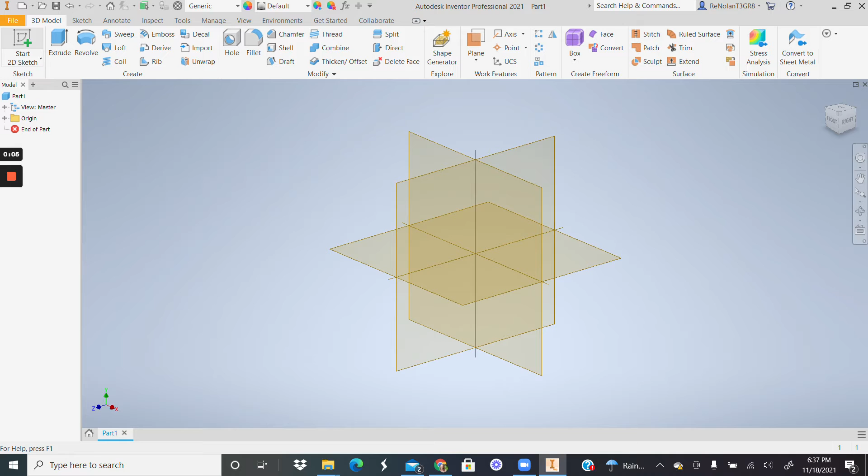Hi everyone, I wanted to talk a little bit about bolts and screws and how to create those in Inventor.

So the first thing you're going to do is start with your sketch. In this case, I'm going to go with a polygon, a six-sided top piece to it. So create my sketch, dimension based on whatever it is you're looking for. Let's go with 12 for now. I'm also going to add some constraints to get it just lined up right.

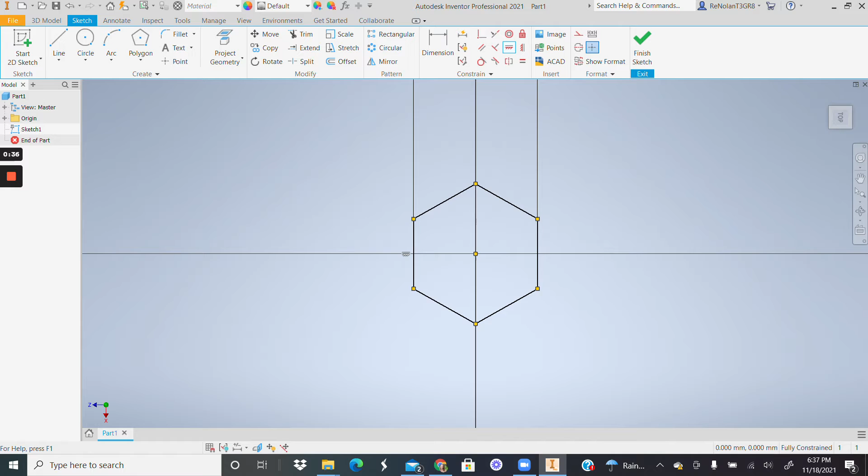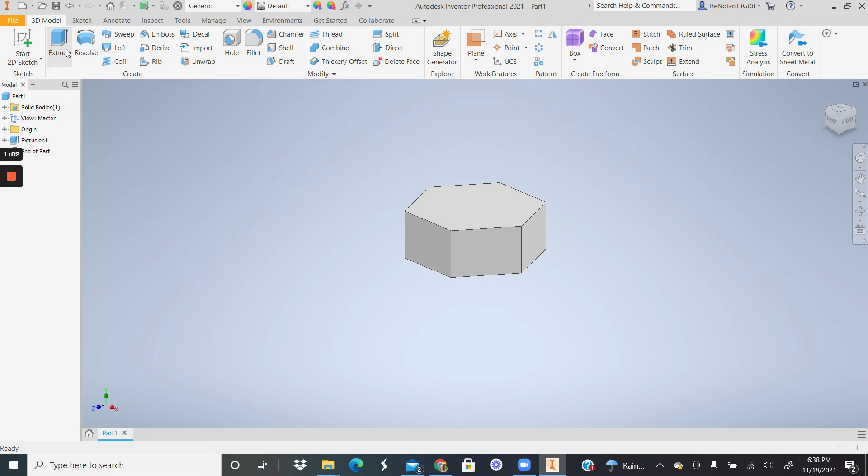Next thing I'm going to do is extrude that, whatever height is needed. Let's go with a 5 for now. A lot of times the top of bolts are going to have a taper to them. This is something you're going to see with nuts also. So the way you're going to get that feature is to start another sketch.

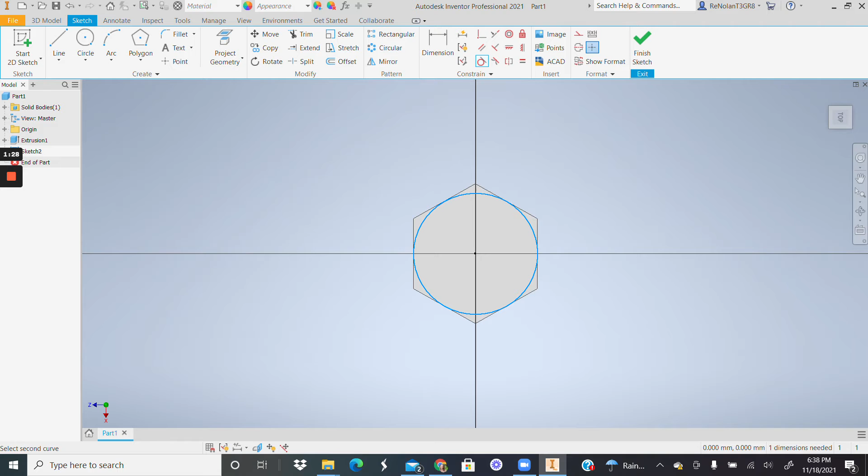In a lot of cases, you're tapering from like a circular part to get taper into the hexagon. So what we're going to do here is we're going to connect to that center point to get our constraints, and then let's add a tangent constraint with our hexagon and finish that sketch.

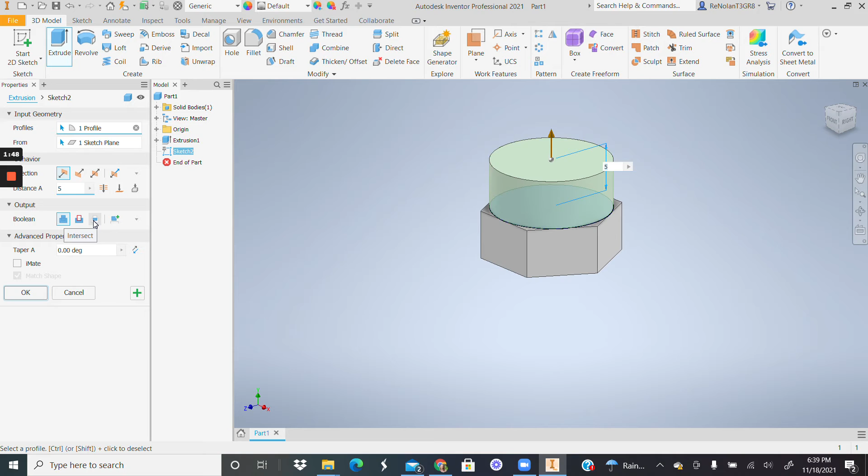Now we're going to go into this extrude feature, and if you look down here for our output options, there's a couple options. So there's join, cut, or intersect. We're going to use the intersect, and we're going to add our taper to it. So let's say you needed a 30-degree taper.

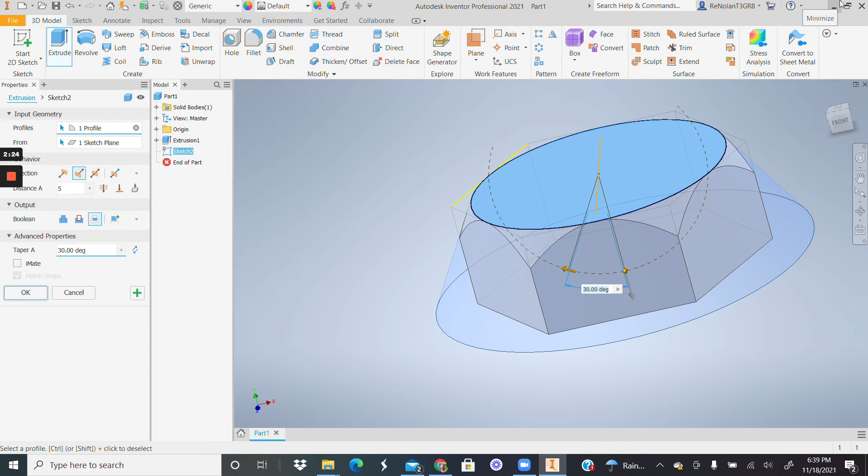You add that in, and in the top portion, as your taper is growing, you're going to have areas where it's cutting off parts of the bolt that was there to give you that taper shape, but as you go down and the taper is expanding, the radius of that extrusion is expanding, we're going to engulf the whole part. So as you move down, there is no additional impact in cutting anything out. So if I were to be working on a bolt, I would most likely have to repeat that process on the other side.

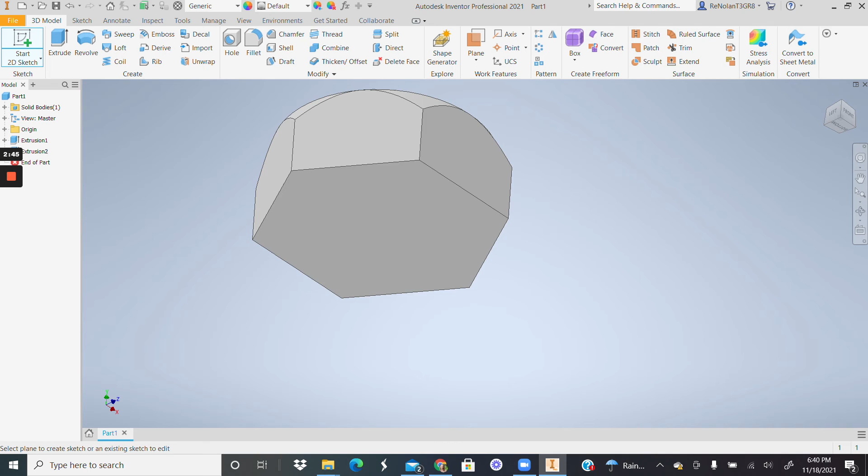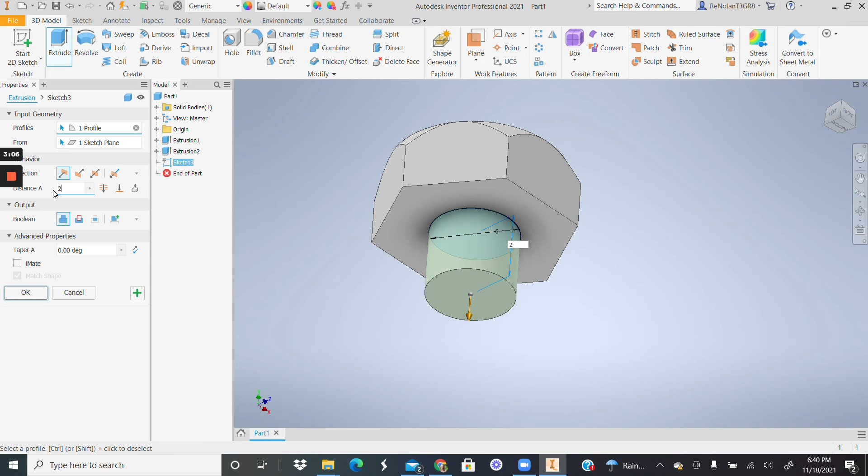If I were working on a screw, I would then add a column. Let's go with 6 millimeters for now. So you're going to extrude to get that portion of your bolt or your screw. In this case, again, we're going to join because we want these to become one part together.

Going to go in adding our threading to it. When you click it, it's going to detect the diameter size that you used to create that column, and it's going to give you some options for what type of threading you can use. So this would just change the pitch and the distance between the threads.

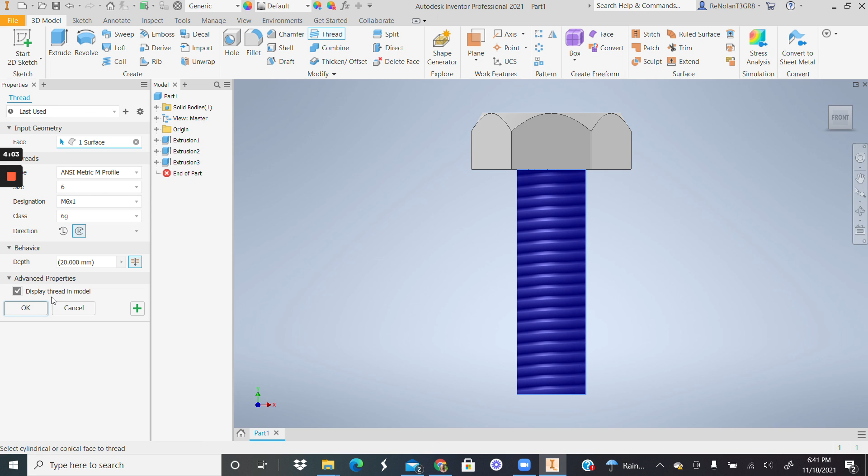So these are metric defaults because we are in metric. So this is saying it's a metric, diameter 6, and then that gives you the additional information. You can change the direction of your threading if needed. Default would be not to change the direction.

And then let's add a little chamfer at the edge, although that one is way too big. Let's go with a 0.5. And there we have it.